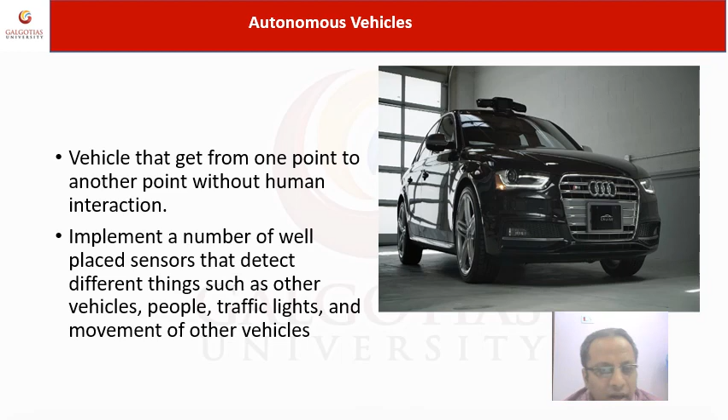Now, a very important thing: what levels are actually involved in the automation of a vehicle? There are six levels of automation involved.

The first level is no automation. No automation means only the driver performs the driving task. There is no system involved, only the basic systems are available in the vehicle, so it's fully dependent on the driver. Drivers control all functions, so we can call this zero automation or no automation.

Then level 1: driver assistance. Here the vehicle is controlled by the driver, but some driving assistance features may be controlled by an electronic system. This is level 1 of the automation levels.

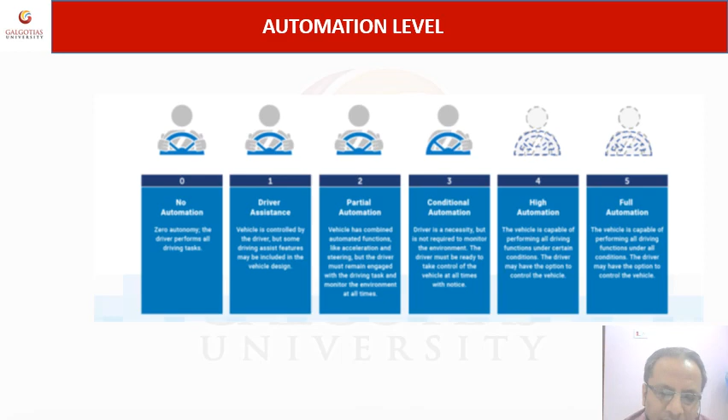So in automation levels for the vehicle, from no automation to full automation, we have seen zero automation, driver assistance automation level, partial automation where only the steering system and acceleration system are performed by the automated system, then conditional automation, high automation, and fully automation or driverless car system.

Next we can see the basic physical ecosystem of an autonomous vehicle - what important systems are actually integrated in the automated vehicle. The GPS system, we know, is applicable for the city road map and location.

Then the Light Detection and Ranging, LiDAR system, for any obstacle detection during the night journey - any obstacle or animal can be detected by the LiDAR system. Then the cameras - front cameras, rear cameras, parking cameras - all these systems are in the automation vehicle. Then the ultrasonic sensors, central computer, radar sensors, and communication-based receiver.

So when all these systems are actually available in any car, we can say the vehicle is in automation condition or is an automated vehicle.

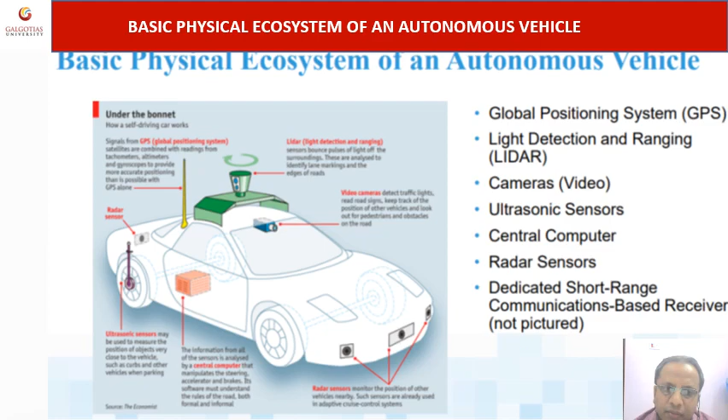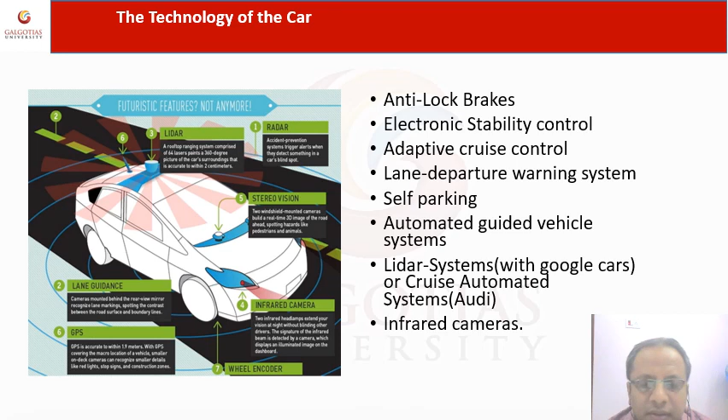Then a few features for the automated vehicle like anti-lock brakes, electronic stability control, adaptive cruise control, lane departure warning system, self parking system, automated guided vehicle system, the LiDAR system, and infrared cameras. All these important parts are available in the automated vehicle or automation system. We can say all the systems are part of the automation for the car.

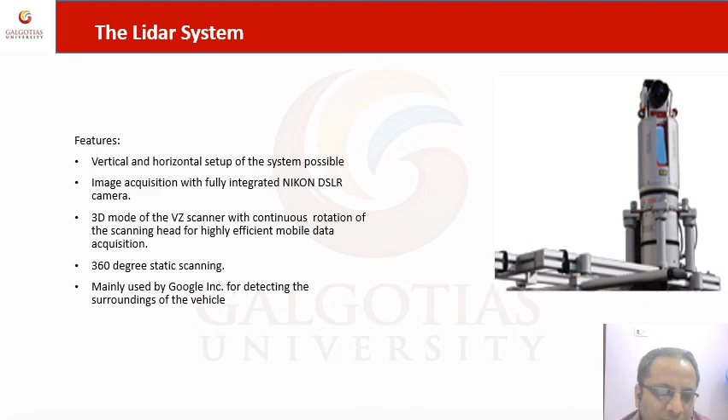So the LiDAR system is important for detecting or locating any obstacle during the night or in any difficulties. The LiDAR system can help the vehicle in terms of the automation system.

Then the cruise system, a very important part for the automation of the vehicle. Some important features are the cruise system, the cameras and radars to map out the surrounding, including other vehicles - it can detect other vehicles and locate them.

The main application of the cruise system is in highway journeys or highway scenarios - the steering wheel motor is mounted to the steering column. Then adaptive speed control is a part of the cruise system.

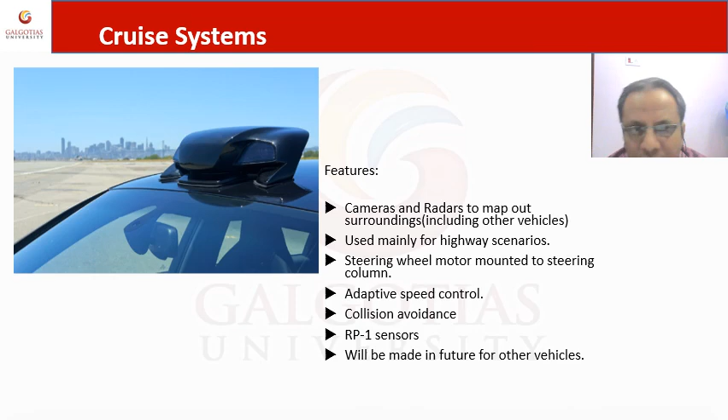Then collision avoidance - information we can receive through the system in any crowded area, or suppose the distance between two vehicles is near and close, the sensor will operate and give a specific sound for the safety of the vehicle. So the cruise system is another important part of the vehicle automation system.

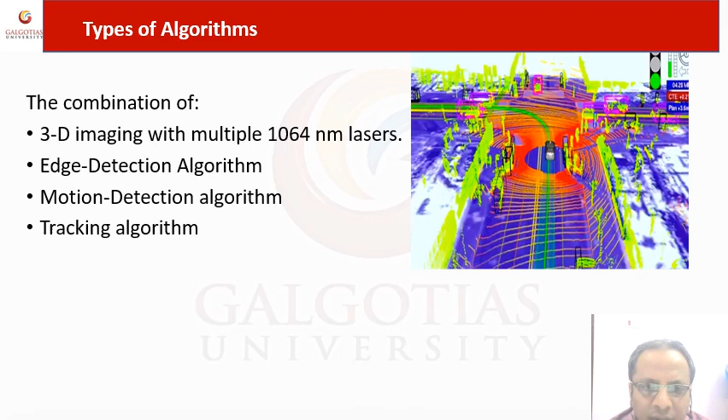So this is the underlying function of the automation used.

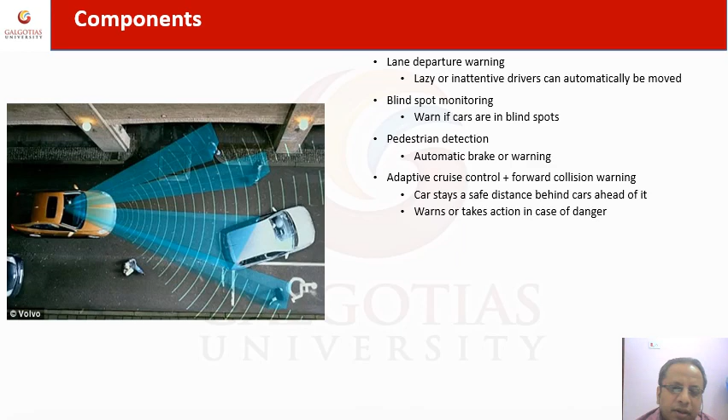So here we can say the automated vehicle can detect any people who are walking on the way, and any car in the traffic, and it can also detect the blind spot, so it can monitor and detect pedestrians walking on the pedestrian path. So all these things are possible to detect or locate through the automation system, and the vehicle can save the people who are inside the car. So this is the importance and requirement for automation.

Then why is automation required? According to this statistical record, 32,719 people were killed in car accidents in the US in 2013.

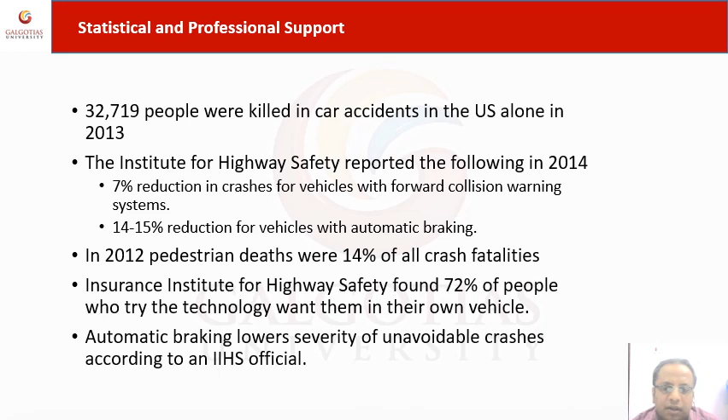According to the IIHS, the Insurance Institute for Highway Safety, 72% of people want this technology in their vehicle. According to globally studied data, about 70 to 75% of people want the automated vehicle for safety to themselves and safety to other people. So this statistical and professional support gives information on why automated vehicles are required.

Then there's performance in adverse weather conditions - poor performance of automated vehicles when atmospheric temperature is below zero degrees, or above 40 degrees Celsius in summer. So high cost and poor performance in climatic conditions like low temperatures around minus degrees are issues. Suppose in Chicago the winter temperature is about minus 10 or minus 8 degrees, the automated vehicle cannot perform well. So these are a few points associated as drawbacks of automation.

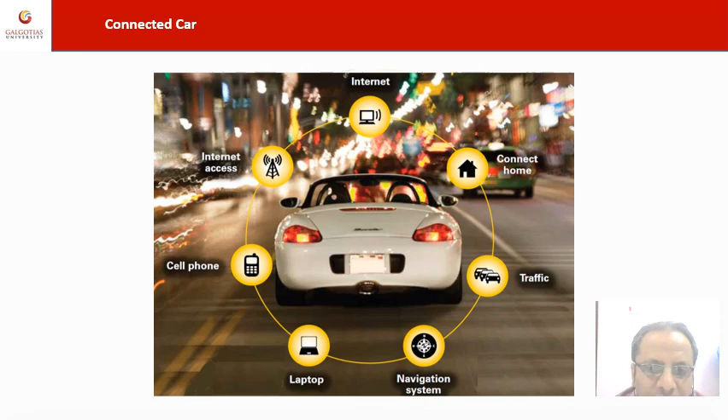Now, automation level 4 and 5 - high automation or driverless car. Here we have the connected car, another technology available. The term connected car means connection with internet access, connection with home, connected with traffic, then laptop, cell phone - all these things can be connected to the vehicle or car. So here we can understand what a connected car actually is.

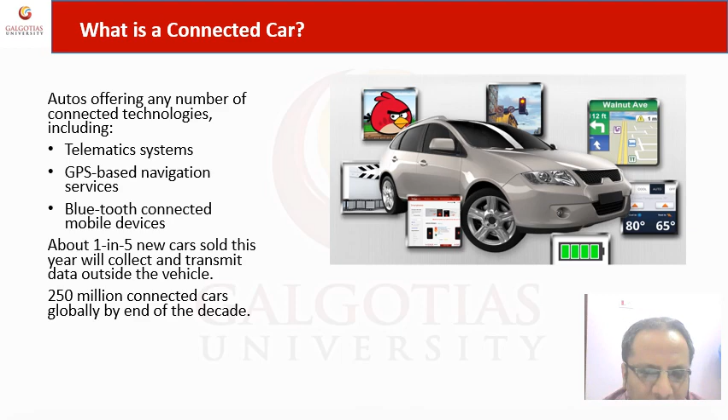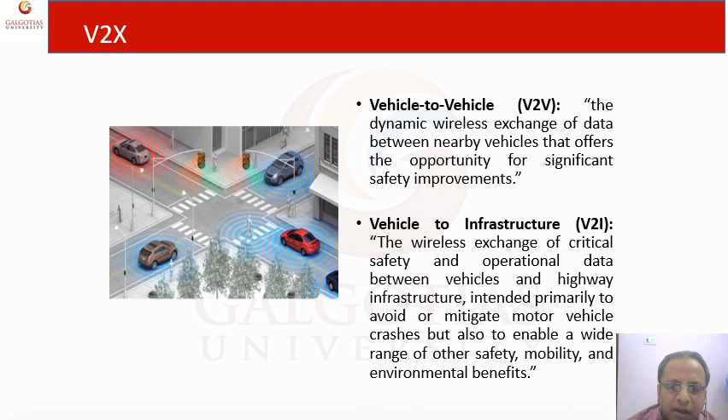A connected car means autos offering any number of connected technologies including telematic systems, GPS based navigation services, and Bluetooth connected mobile devices. About 1 in 5 new cars this year have been launched as connected cars. The Morris Garages brand company launched the MG Hector, which is actually a connected car. About 250 million connected cars have been launched globally. So V2V, V2I, we have discussed - we can see the possible connectivities for the connected car.

So with this reference, I am concluding this chapter. The discussion covered automation, automation levels, connected car technology, public acceptance, and why automation and connected cars are required in the coming future as a modern vehicle system. Thank you.